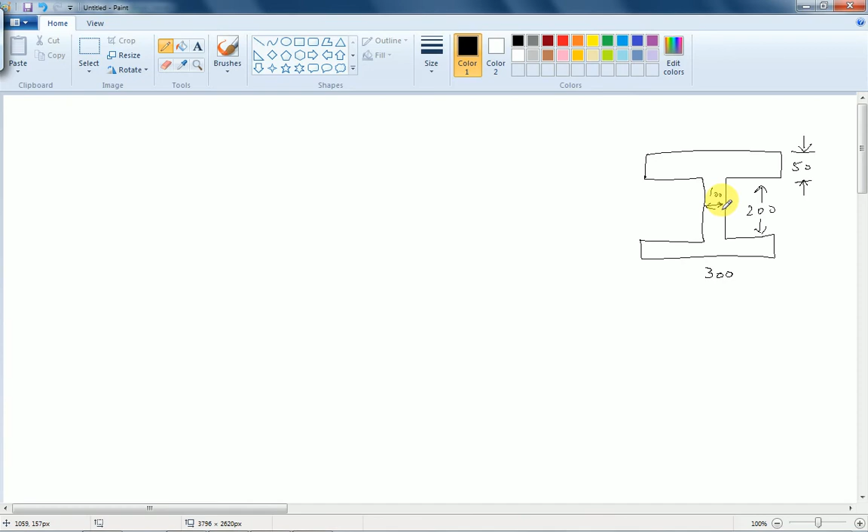All dimensions are in millimeter, मिलीमीटर में है, और इसका जो चीज़ फाइंड करनी है वो है मोमेंट ऑफ इनर्शिया इन एक्स डायरेक्शन।

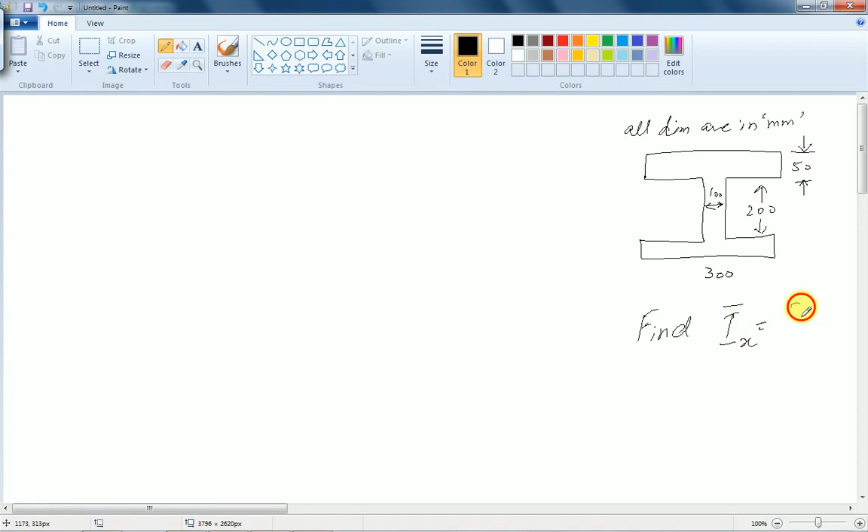ठीक हो गया। तो मोमेंट ऑफ इनर्शिया इसका एक्स एक्सिस में, यानी कि इस बीम के सेंट्रॉयडल एक्सिस के अबाउट हमने निकालना है। तो वो फाइंड आउट करना है। अब इस बीम का सेंट्रॉयडल एक्सिस बेसिकली इस आई बीम के क्रॉस सेक्शन का पूरा ओवरऑल सेंट्रॉयडल एक्सिस कुछ इस तरह ट्रेवल कर रहा है।

ठीक है। इसके अबाउट बेसिकली निकालना है। तो इसको सॉल्व करने से पहले हम एक बात रिकॉल कर लेते हैं।

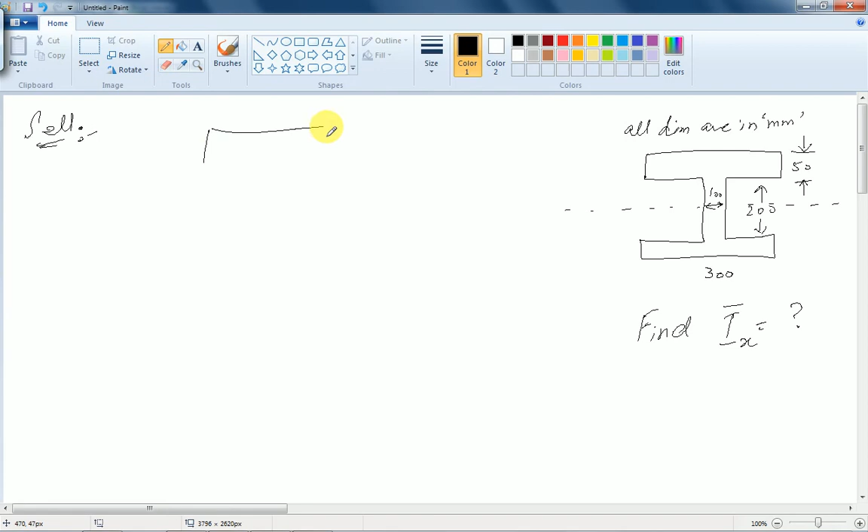कि अगर हमारे पास एक रेक्टेंगल हो और उसका सेंट्रॉयडल एक्सिस कुछ इसी तरह रेफरेंस पर ही है, एक्स वाई, और उसकी हाइट H है और उसकी ब्रेथ B भी है, ये डायमेंशंस हैं इसकी। तो इसका मोमेंट ऑफ इनर्शिया क्या होगा?

तो इसका मोमेंट ऑफ इनर्शिया जो हमने पता है, I_x के अबाउट, वो बेसिकली 1/12 B H क्यूब, ये इसका मोमेंट ऑफ इनर्शिया होगा। लास्ट लेक्चर में इसको हमने डिराइव भी किया है, क्योंकि ये इस रेक्टेंगल के अपने सेंट्रॉयडल एक्सिस जो कि एक्स एक्सिस में से पास करेगा, इस रेफरेंस में से पास करेगा, इसके अबाउट है।

इसलिए ये 1/12 B H क्यूब इसका बनेगा। लेकिन लेट्स सपोज अगर हम इस रेक्टेंगल के सेंट्रॉयडल एक्सिस की बजाय अगर हम इस पॉइंट पर, इस एक्सिस पर, एक्स डैश एक्सिस, वाई डैश एक्सिस, इस एक्स एक्सिस के अबाउट अगर हम निकालने की कोशिश करें, मतलब I_x डैश, तो इसकी वैल्यू क्या होगी?

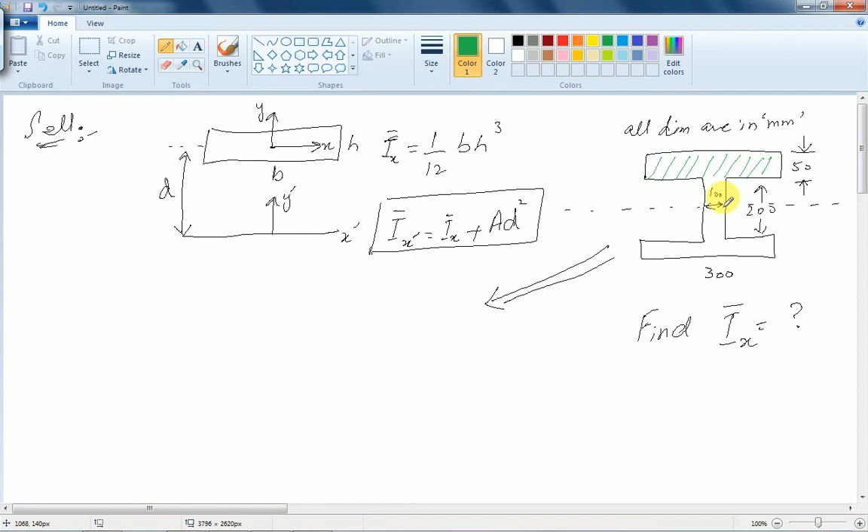इस चीज़ को याद रखते हुए हम अब अपने प्रॉब्लम पे आते हैं। बेसिकली हमारा ये जो प्रॉब्लम है, इसको हम डिफरेंट हिस्सों में डिवाइड करते हैं। पहला हिस्सा ये रेक्टेंगल हमारे पास है, ये ग्रीन कलर की। इसी तरह दूसरा हिस्सा है हमारे पास ये वाली रेक्टेंगल, ये ब्लू वाली। और इसी तरह तीसरा एक हिस्सा है, तीसरी रेक्टेंगल ये है, ये रेड वाली जो मैंने हाईलाइट की है। और ये पहली रेक्टेंगल है। तो इसी तरह हम ये पहली रेक्टेंगल को इधर ऊपर अगर बनाएं तो ये बेसिकली ये चीज़ बनती है पहली, दूसरी, और ये तीसरी, ये 3 रेक्टेंगल्स बेसिकली बनती हैं।

तो इन तीनों को हम सॉल्व करने की कोशिश करते हैं। जो सबसे पहले ऊपर वाली ग्रीन रेक्टेंगल लेते हैं, मतलब इस पूरी आई बीम का जो क्रॉस सेक्शन है, इसका मोमेंट ऑफ इनर्शिया जो वैल्यू होगी वो बेसिकली होगी आई एक्स बार विल बी इक्वल टू मोमेंट ऑफ इनर्शिया ऑफ दिस रेक्टेंगल प्लस मोमेंट ऑफ इनर्शिया ऑफ दिस रेक्टेंगल प्लस मोमेंट ऑफ इनर्शिया ऑफ दिस रेक्टेंगल। इन तीनों का मोमेंट ऑफ इनर्शिया हम ऐड करेंगे। तो सबसे पहले पहले वाली ये रेक्टेंगल ले लेते हैं, ग्रीन वाली। इसका मोमेंट ऑफ इनर्शिया क्या होगा, आई एक्स बार ऑफ फर्स्ट रेक्टेंगल प्लस आई एक्स बार ऑफ सेकंड प्लस आई एक्स बार ऑफ थर्ड।

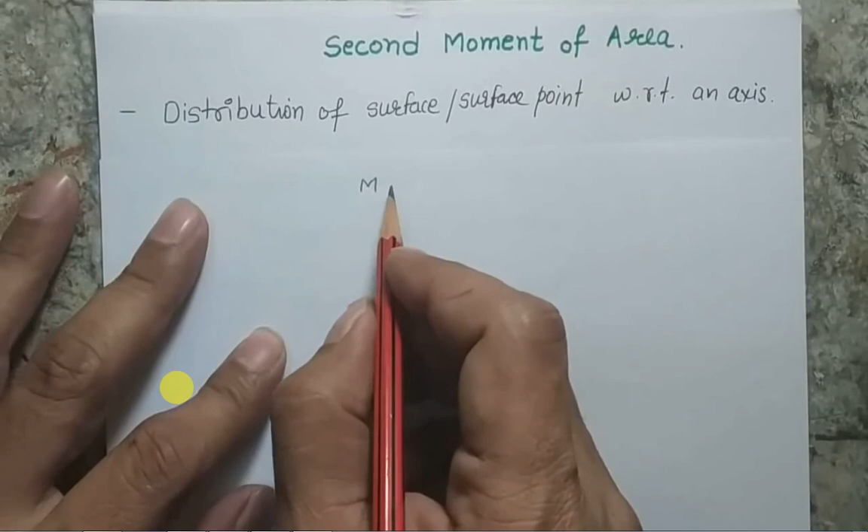This session is dedicated to understanding of second moment of area. Basically, second moment of area is a mathematical term we have defined to understand the distribution of a surface or a surface point with respect to an arbitrary axis. What does it mean? If we recall the term moment of inertia, we have already studied this term in our school, that moment of inertia basically tells us the inertia against the rotational motion.

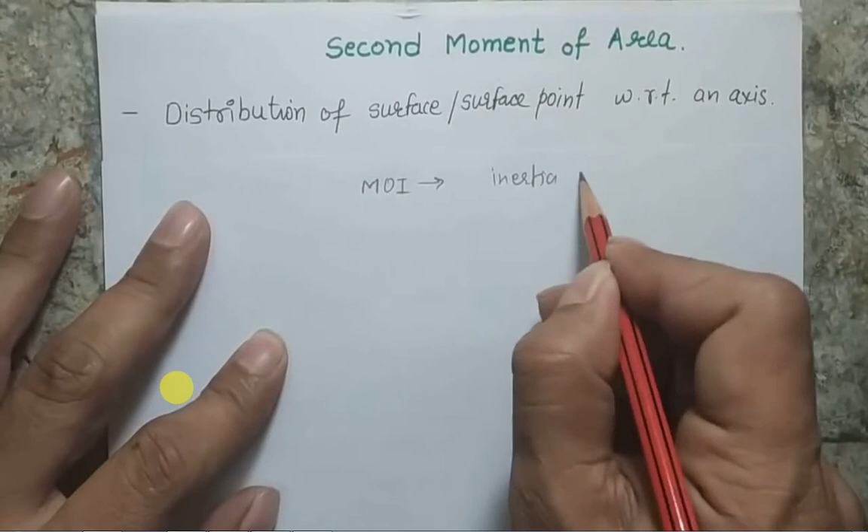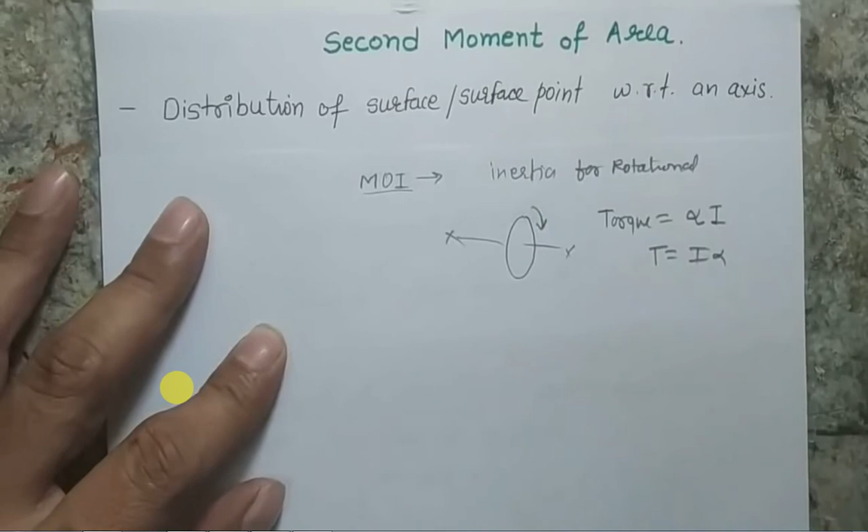That means if I am having a body which is able to rotate about an axis, suppose the axis is xx and this body is capable to rotate about this axis, so what would be the value of torque to achieve a particular angular acceleration alpha can be defined with the help of its moment of inertia. So torque is equal to I alpha, and this moment of inertia is basically equivalent to the inertia which we discuss about linear motion, where force is equal to mass into acceleration, where m represents the inertia when we talk about linear motion. Similarly, the moment of inertia represents the inertia against rotational motion.

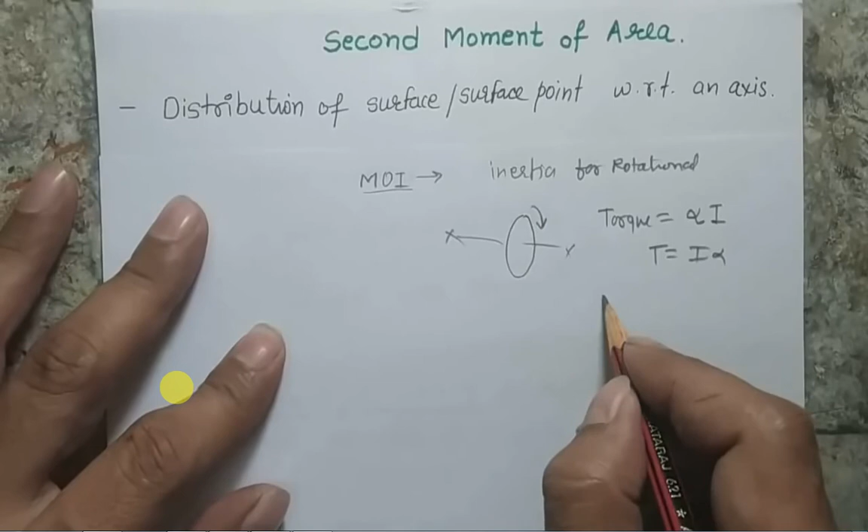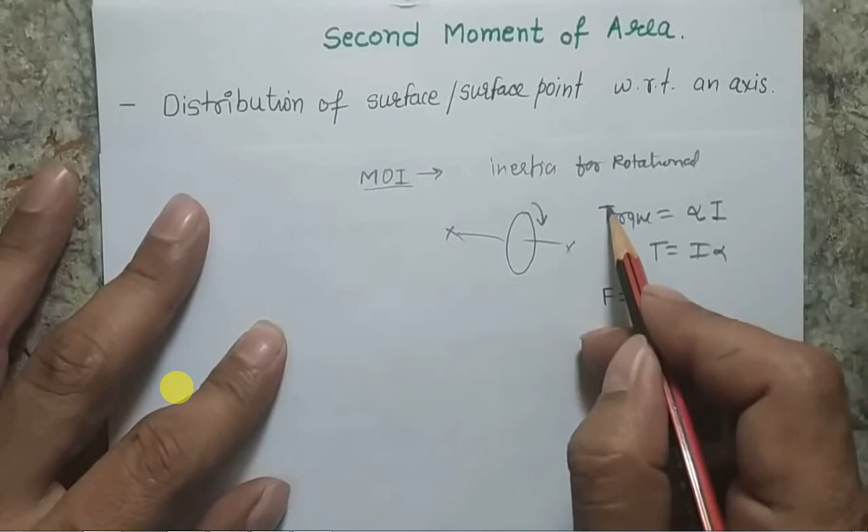Torque is equal to I alpha, and this moment of inertia is basically equivalent to the inertia which we discuss about linear motion, where force is equal to mass into acceleration, where m represents the inertia when we talk about linear motion. Similarly, the moment of inertia represents the inertia against rotational motion.

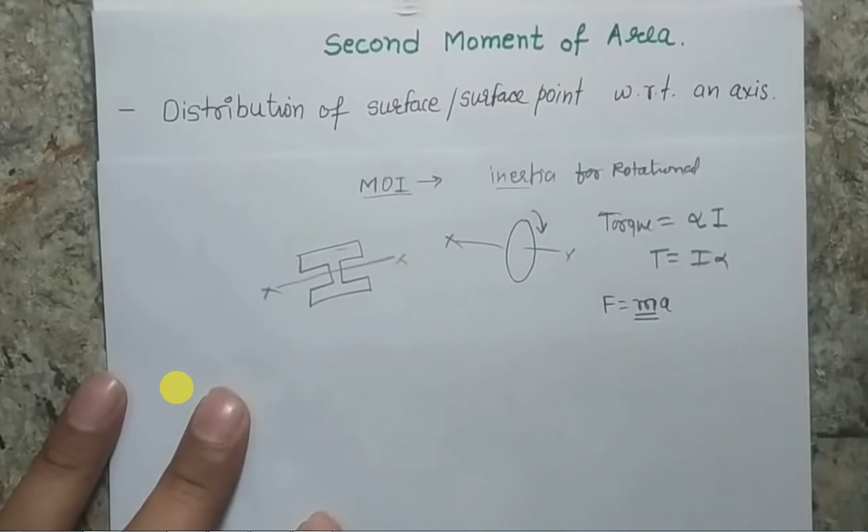This is another form of this moment of inertia, but particularly we are not talking here about the distribution of mass about an axis of rotation. Instead of that, we talk about the distribution of area itself. For example, if I am having this kind of a body and I am interested to understand what is the distribution of its area about this axis, this is my axis — this sort of thing we discuss and understand in the second moment of area.

I will also explain the physical significance of second moment of area, or where it is particularly applied in the engineering field. So let's start that the second moment of area, also known as the area moment of inertia or the second area moment — these are different names. We can call it anything, the second moment of area, or sometimes it is called the moment of inertia of an area. All the terms are similar and the meaning is the same in all cases. So now let's try to understand that — I have already said this is the moment of inertia.

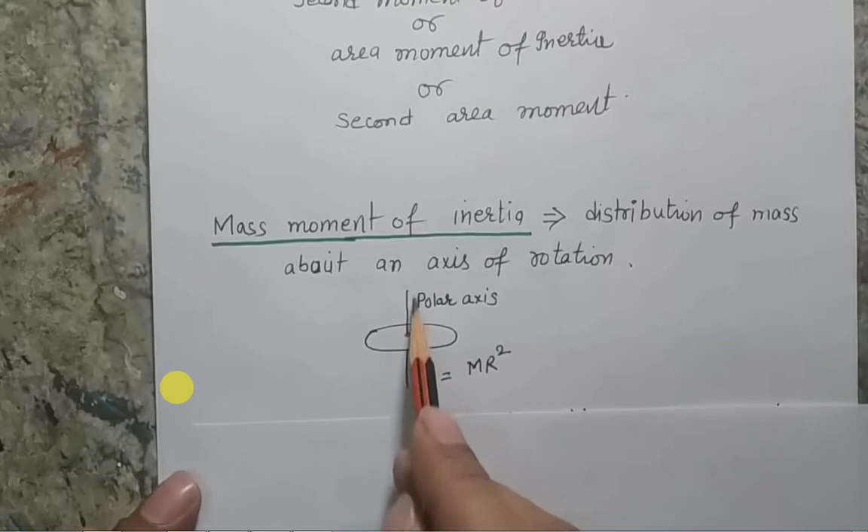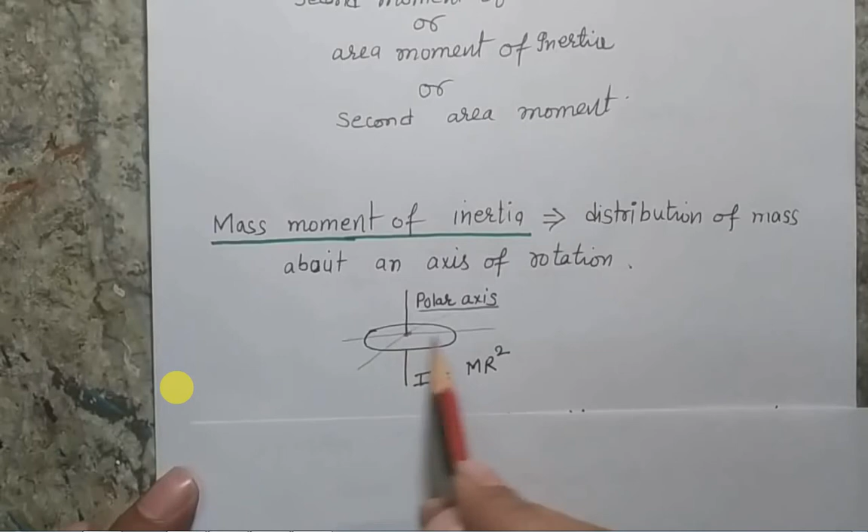Suppose I am having a ring which can be rotated about an axis passing from the center of the ring, perpendicular to the surface of the ring. This axis perpendicular to the surface is known as the polar axis. If I am talking about axes passing from the center but within the plane, these are known as axes in the plane. But an axis perpendicular to the surface is basically known as the polar axis. We should remember this term because it will be used in the study of second moment of area.

So moment of inertia basically represents the distribution of mass. Similarly, its application gives the sense of the value of torque required to get a specific angular acceleration.

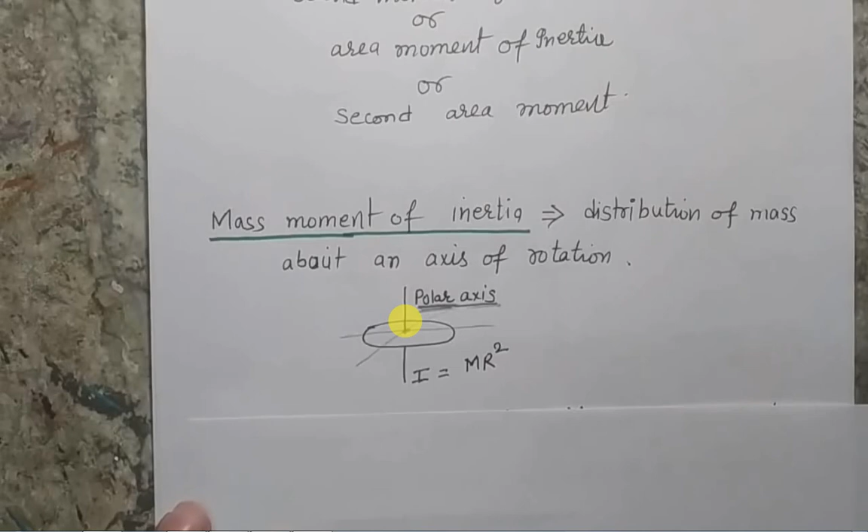So moment of inertia basically represents the distribution of mass. Similarly, its application gives the sense of the value of torque required to get a specific angular acceleration.

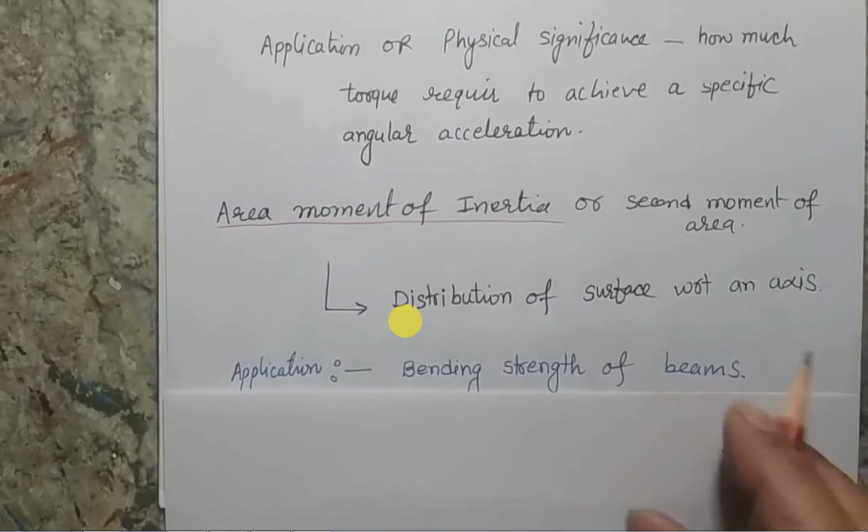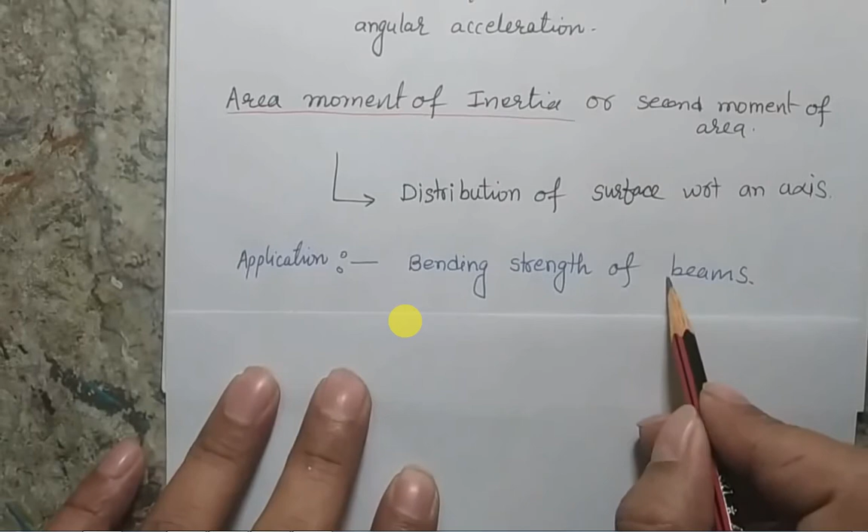In case of second moment of area, it gives the distribution of surface with respect to a particular axis, and one of the apt applications of second moment of area is to find the strength of beams. Now you should understand what a beam is.

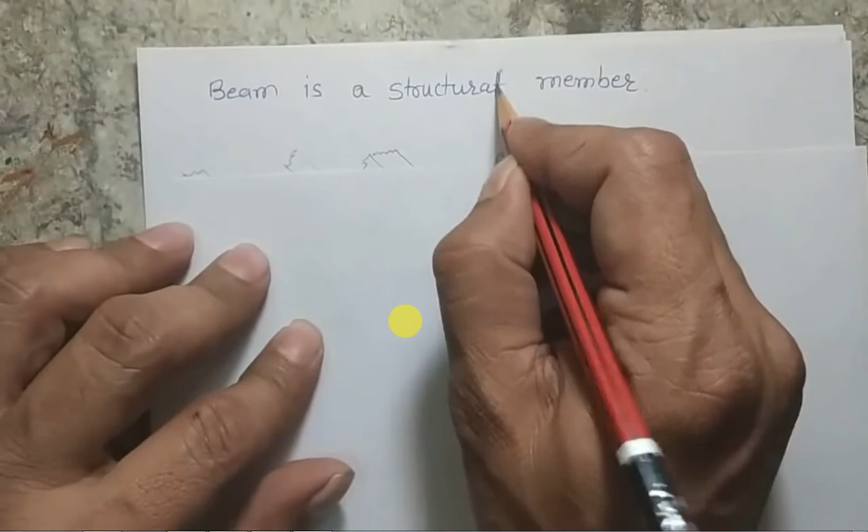So beams are basically structural members which are used in many engineering constructions, to make the frames, or to make the machines or the trusses. Anywhere where we have structures, we need such long beams.

There are many types of beams and cross sections, for example square, cylindrical, C-section, channel C-section beams you may have seen. I-section beams are very common in construction purposes.

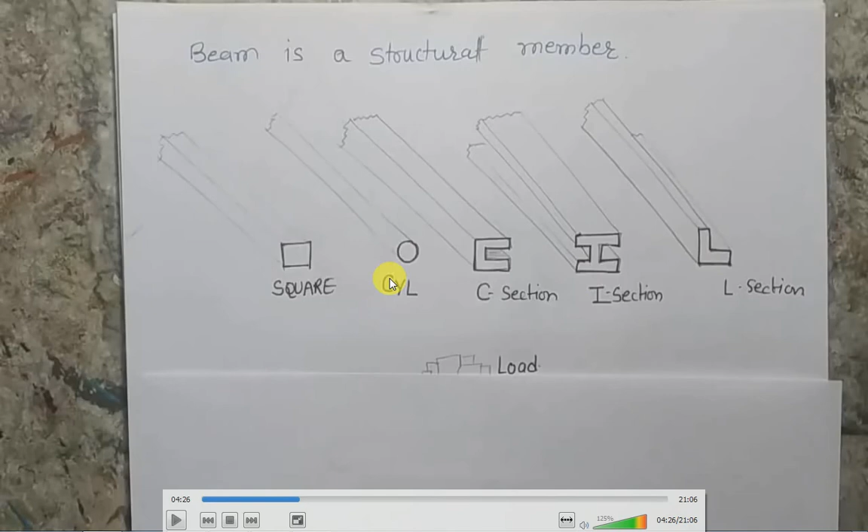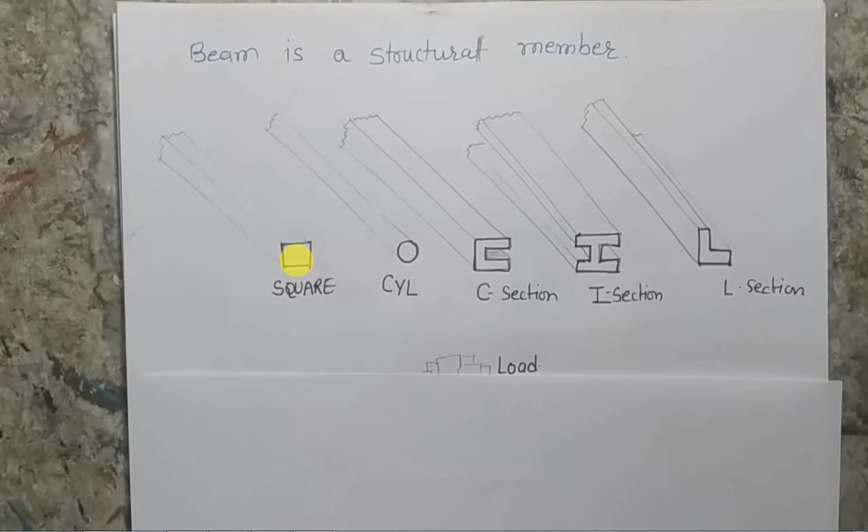And those are subjected to transverse loads and bending loads, so wherever we have a structure subjected to transverse load, we require beams. So a beam may be of different cross sections: square, cylindrical, C-section, I-section, L-section. You may also see different sections like T-sections or other sections.

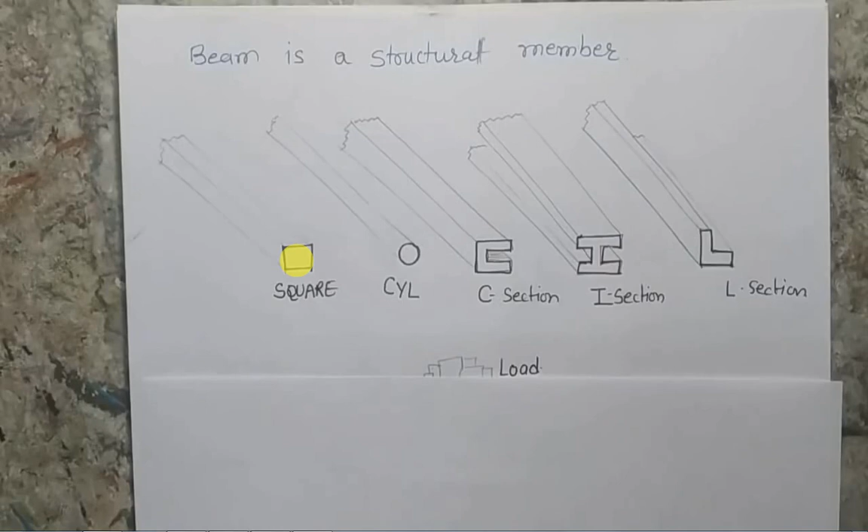So what is the significance of different cross sections? Why do we only use a square section or a cylindrical section? Because its manufacturing is simple. How can we make these types of structures? Basically we use the rolling process or the extrusion process to make the beams.

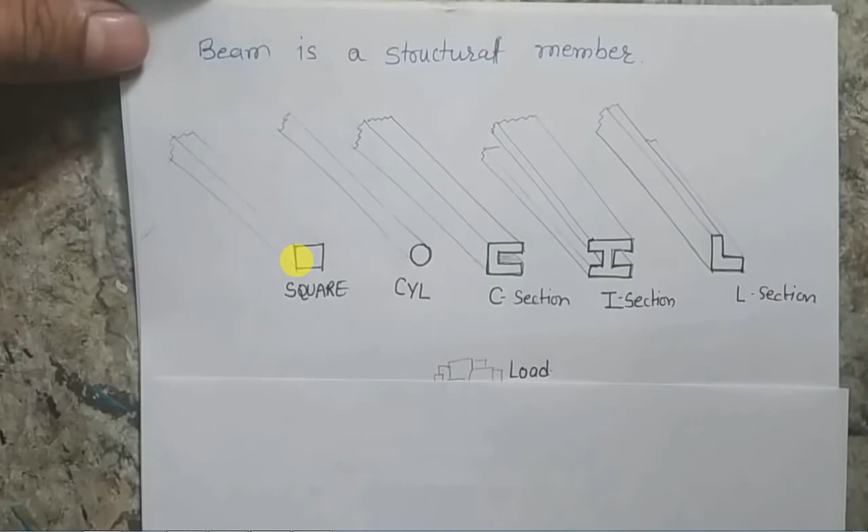But what is the requirement of the C-section, I-section? Let's take an example and try to understand first the beam strength, so that we will be more clear about the physical significance of second moment of area.

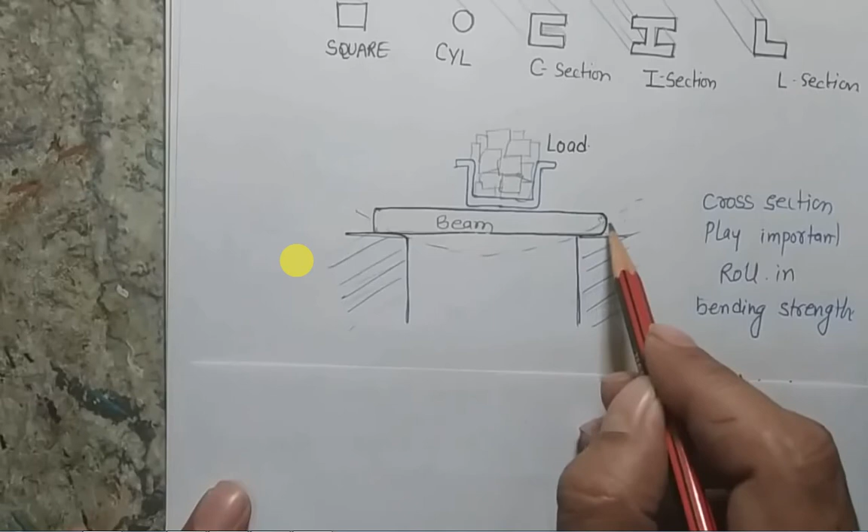Suppose I am using a beam to support a heavy load between two surfaces. If I cut my beam at this point, I can see the cross section, which may be square, cylinder, I, T, whatever. This cross section has an important role in the bending strength of this beam.

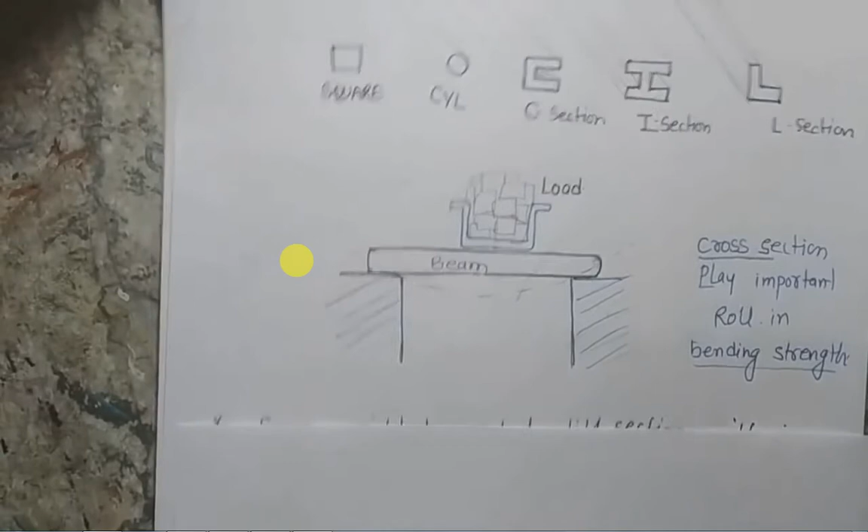In what way? This is the topic we basically study in the strength of materials course. I am not going to give more detail here, but I will give you an essence so you have a feel for the topic. So suppose this beam is loading this weight, and due to the load, the cross section plays a very great role in the significance or strength of the beam.

In mechanics of materials 1, we have studied the cross section dimensions: B, the width, and H, the height.

On these values of cross section, beam strength and stability totally depend upon these dimensions. So 1 by 12 BH cube of a rectangular or square beam defines how long the beam will stay, or when and how much the beam will bend upon a particular load.

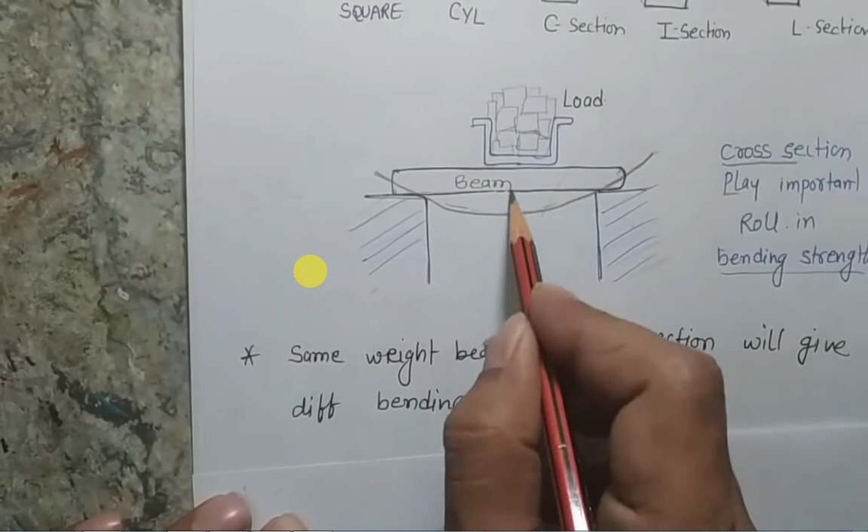The beam has bending, and the bending at the center of the beam is defined by a term delta or del.

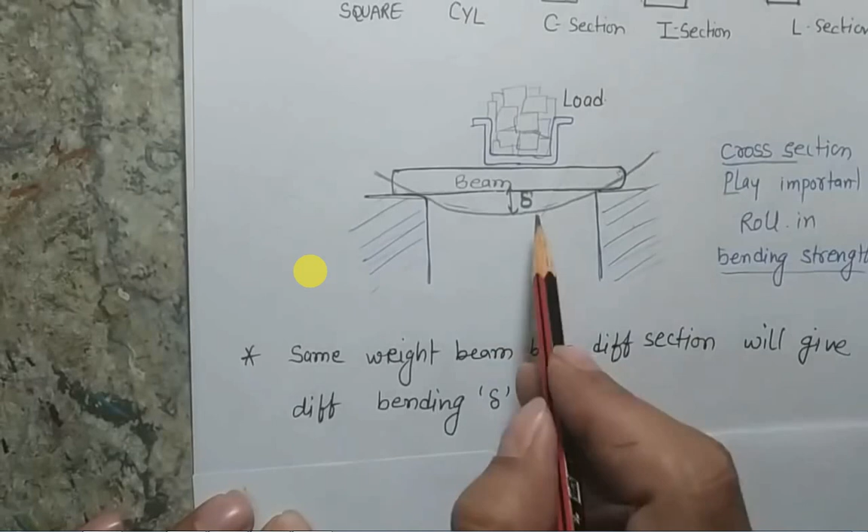What would be the value of del, basically governed with respect to different sections? The strength or deflection value of the beam can be defined as the strength of the beam. If the bending of the beam is large, we say the beam has lower bending strength; if the beam is very rigid and doesn't show deflection, the beam is very strong. That strength is basically proportional to the second moment of area.

How we get this formula, I am not going to give in detail. If you are interested, you have to study the books available for the strength of materials course.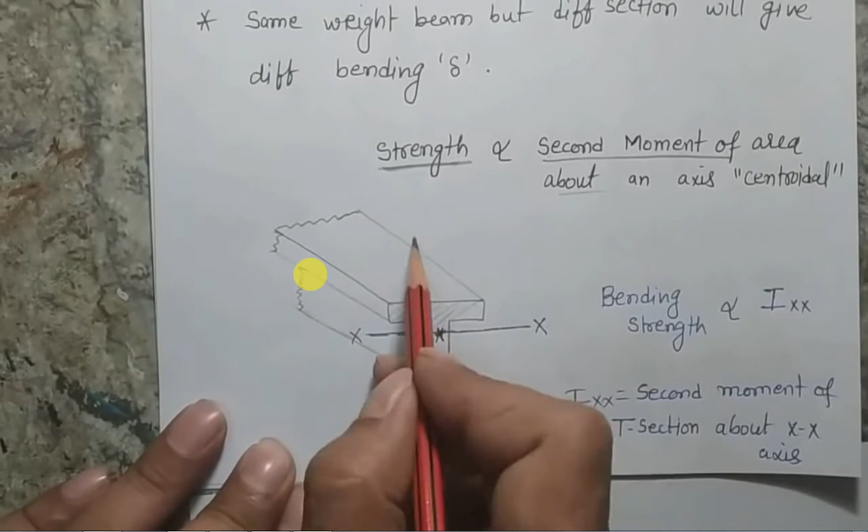Here I am just giving you an essence: suppose I have a T section beam, and here is the centroid of the beam, with an axis passing through the centroid. This is the depth or length of the beam, and I want to find, if I use this T section beam here, what would be the deflection.

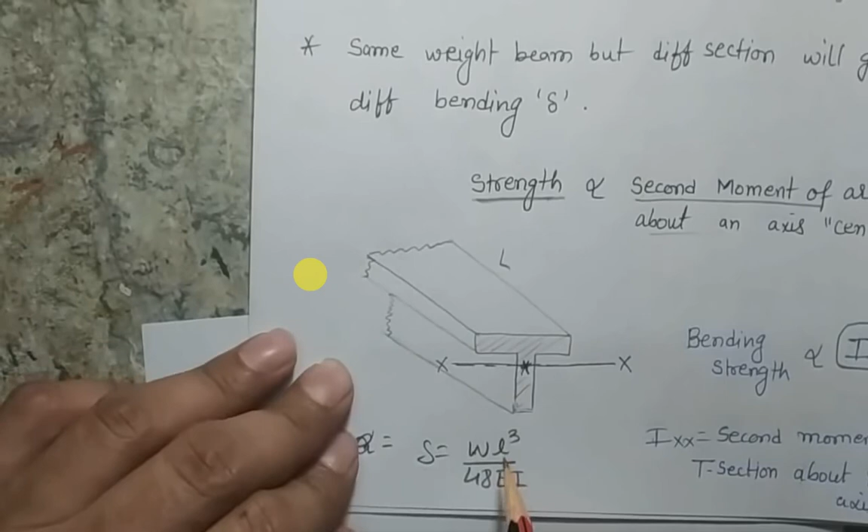That deflection can be calculated if I know the value of I, using a formula. I'll just give you the formula without going into detail: del can be calculated by W L cube by 48 EI, where W is the loading and L is the length of the beam. So for this context, if this is the length of the beam, the deflection of the beam will be WL cube by 48 EI.

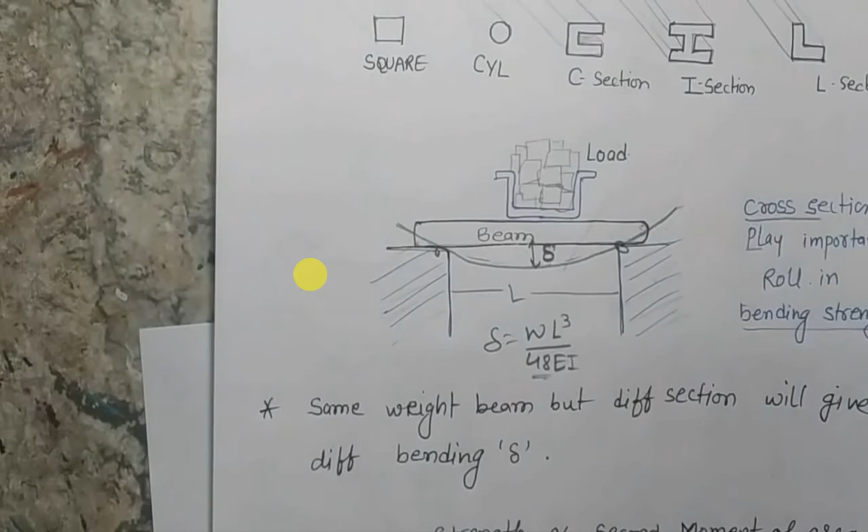And why 48? Because this is the case of a simply supported beam. For different boundary conditions, the formula changes, but this I basically gives you the value of del.

So this strength is inversely proportional to del, meaning strength is proportional to 1 by del, and so the strength will be proportional to I, because del is inversely proportional to I.

Now I am not going to any further detail of the strength of beams, and I am jumping to the mathematical expression of the second moment of area. For example, we have an arbitrary shape body. I am particularly talking about planar bodies because the whole syllabus for mechanics at the undergraduate level talks about planar sections. So here also I am taking a planar body.

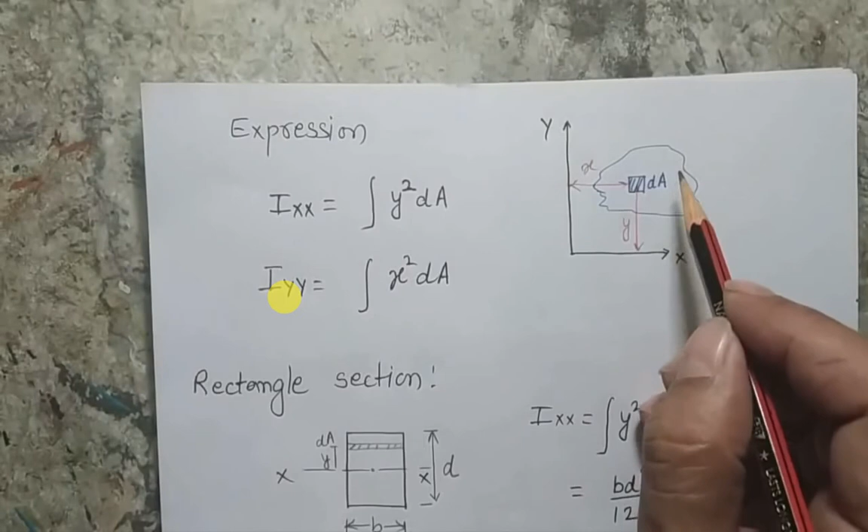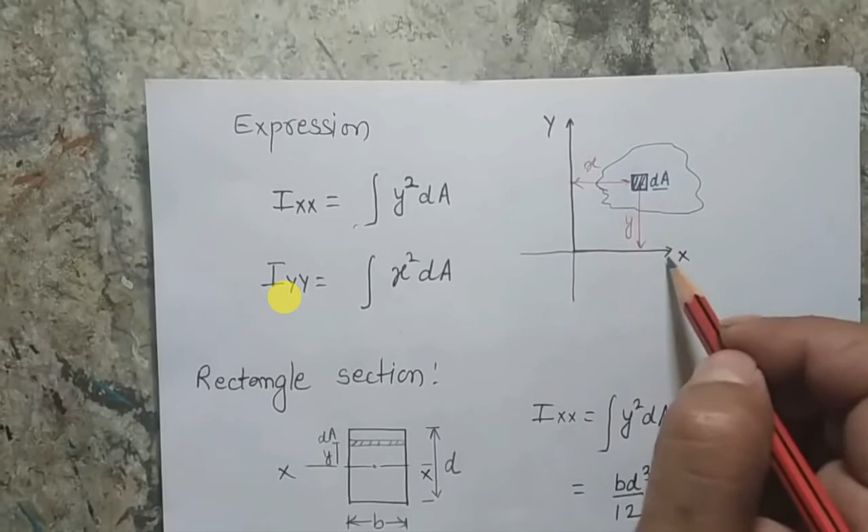Suppose I want to find the second moment of area of this body about the x-x axis or y-y axis. Here is the formula. First I assume a small section area del A, and if I know the distance of del A with respect to the x axis, here is the formula to get the moment of area about x-x. Similarly, for the second moment of area about y-y.

But let me tell you, in this whole subject we are not going to derive the formula for the second moment of area of different bodies. Instead, we are going to calculate the second moment of area for irregular shapes using standard shapes, just as we did to calculate the centroid.

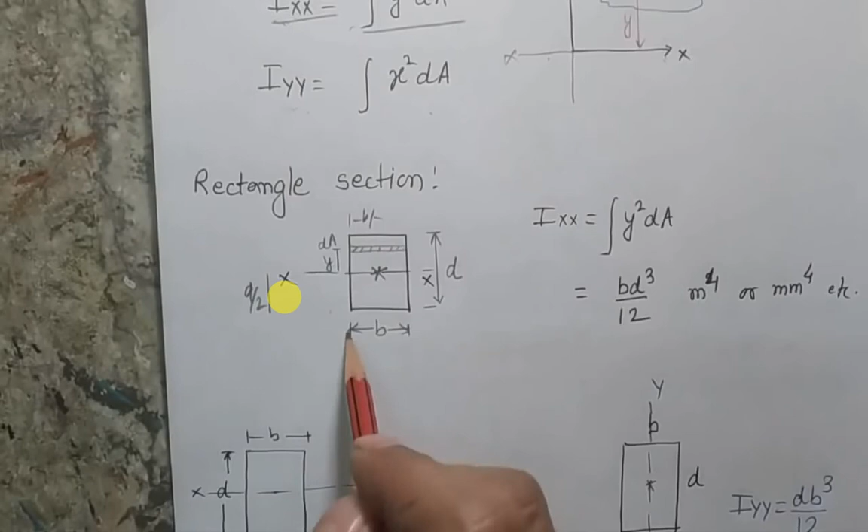So here I am showing you that one standard shape is a rectangular body. For a rectangular body, if the centroid is located at a distance d by 2 from the base and b by 2 from the side, I am interested to find the second moment of area about an axis passing through the centroid, generally known as the centroidal axis.

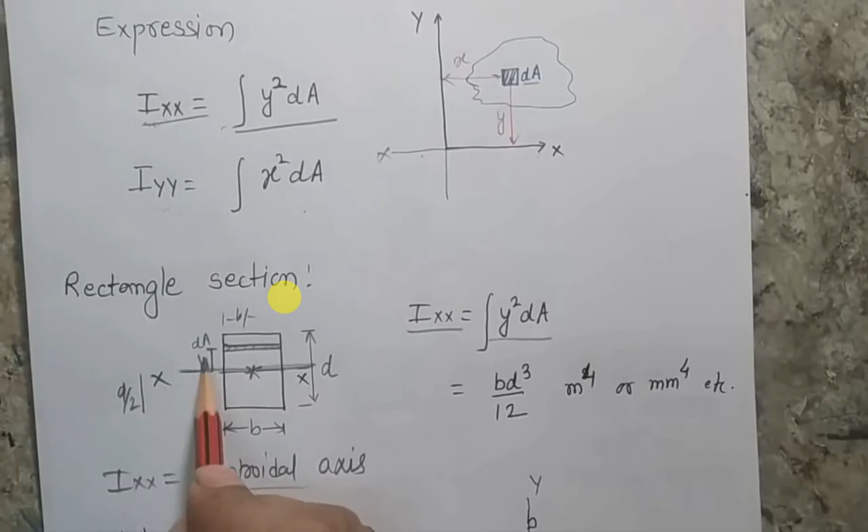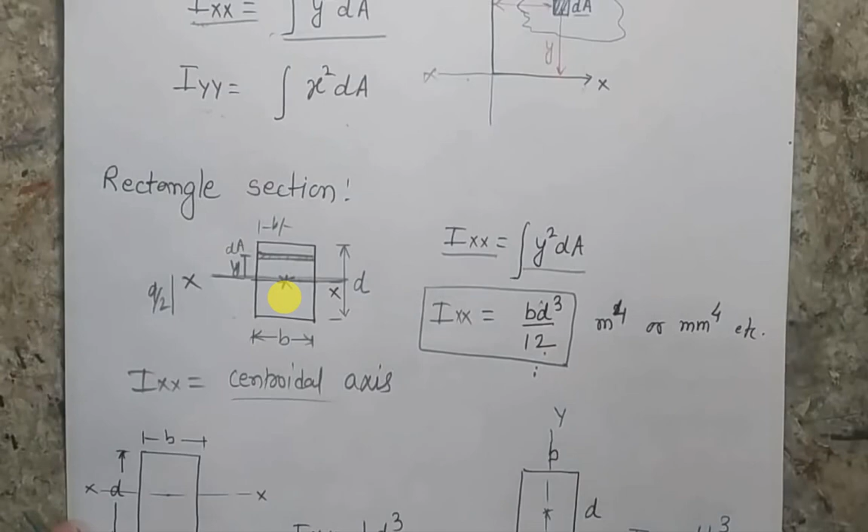Here IXX is defined as one of the centroidal axes. If I am interested to find it, I can consider a small strip at a distance y from this axis, and if I do the integration, I will finally arrive at the formula BD cube by 12. Please remember this formula, because it is not easy to derive every time, and we will use such formulas frequently to calculate the moment of area of different sections. So for a rectangular body, the mass second moment of area is defined by BD cube by 12.

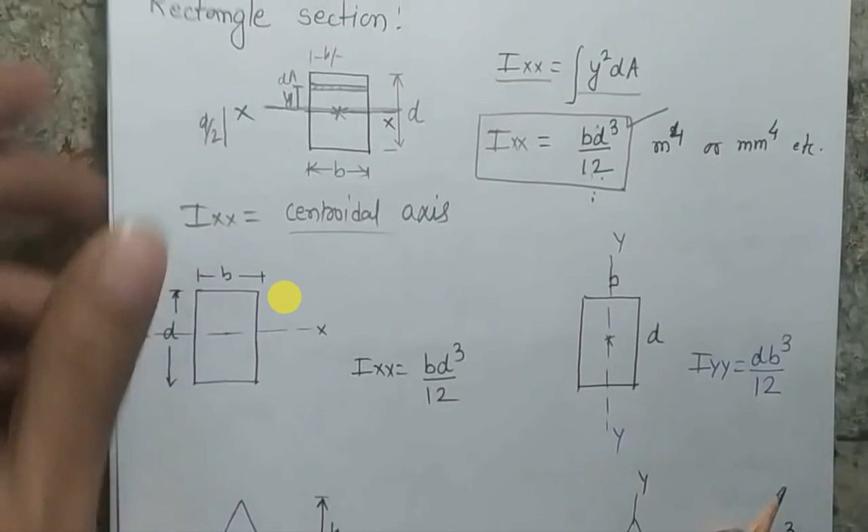Let me explain all the moments of area one by one. Suppose this is the rectangular body, and I am interested to find the moment of area about the x-x axis, which I already calculated: it is BD cube by 12. Now suppose I want the moment of area about the vertical centroidal axis, passing through the centroid in the vertical orientation. It will be just the opposite - the D and B will be replaced, so now it becomes DB cube by 12.

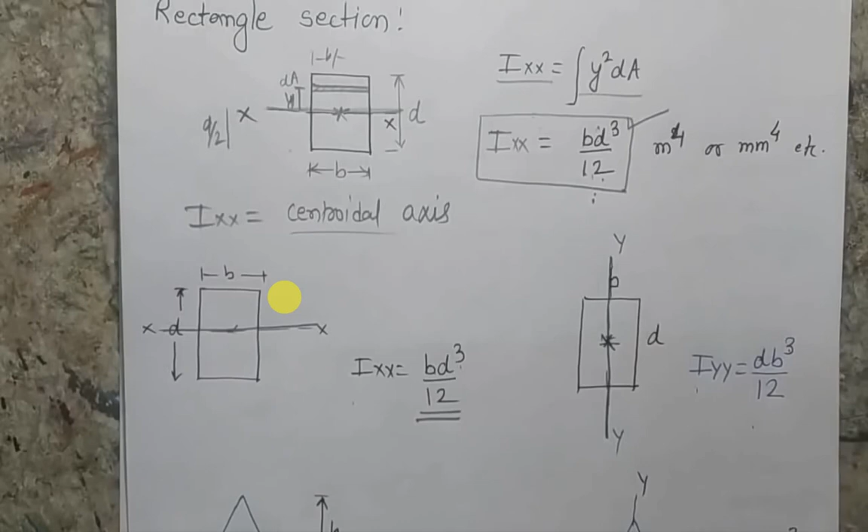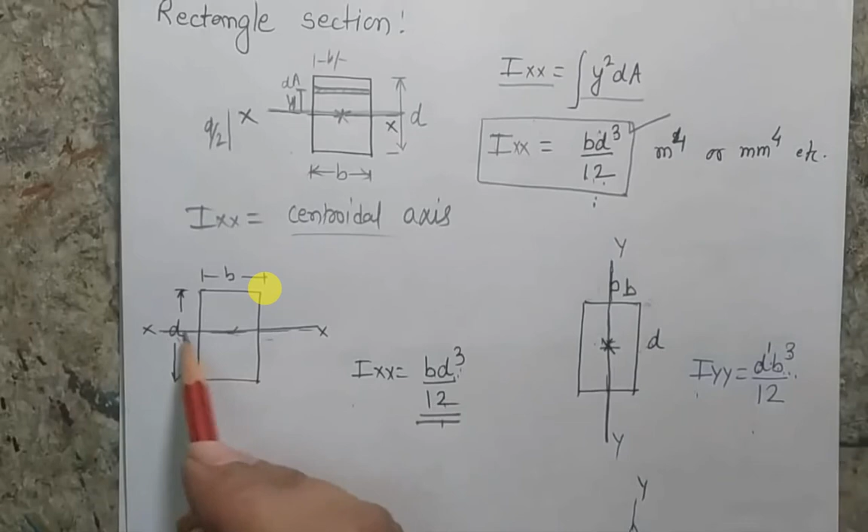I suggest students remember this formula and the axis rule: if the axis is cutting a particular line, then that side's term is raised to the power of cube. The size of that line is defined by B, so B will be in the cubic term, and the other term parallel to the axis will have power 1. Here, this is my axis and this is the side, so B is not in the cubic term, however D is in the cubic term.

Similarly, if you want to find the moment of area of a triangular section about its centroidal axis - in a triangle, the centroid is at a distance h by 3 from the base, if h is the height of the triangle. Its second moment of area is defined by bh cube by 36. Similarly, if I want to find the second moment of area about the y axis, it is defined by hb cube by 48.

This is a very interesting point: these two are not just interchanging terms, because the distribution of mass about these two sides is not represented simply by b and h. Similarly, these two formulas are not the same - you should remember that one is hb cube by 48 and the other is bh cube by 36. In one of my future sessions I will explain how we calculate these two, but not this time.

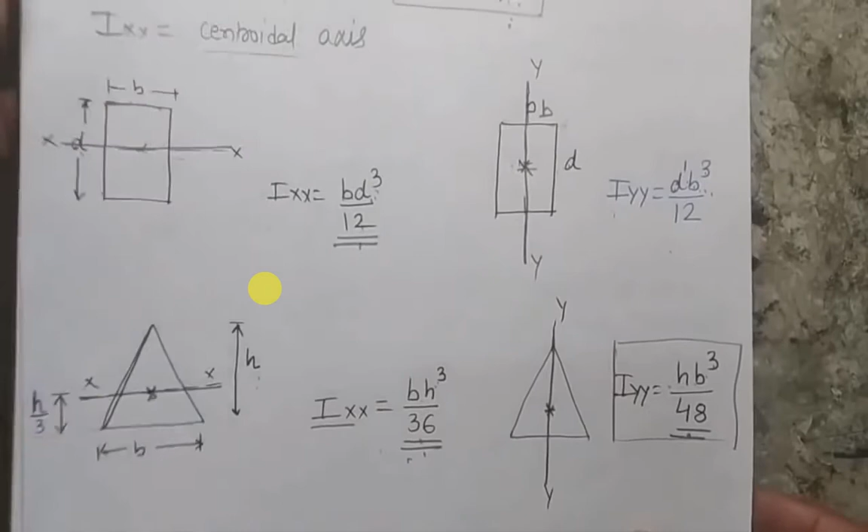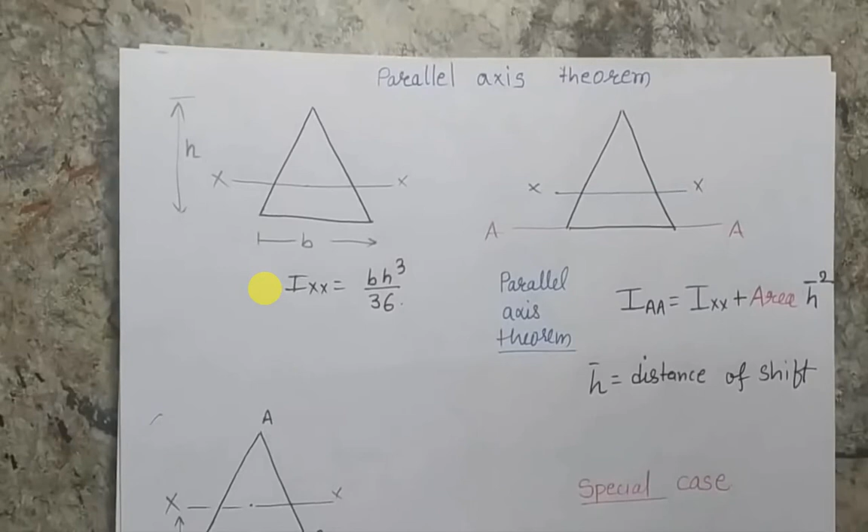Now let's move further and understand one of the important concepts, the parallel axis theorem. We are going to use it frequently to find different moments of area, and here I am going to explain how we can define this term.

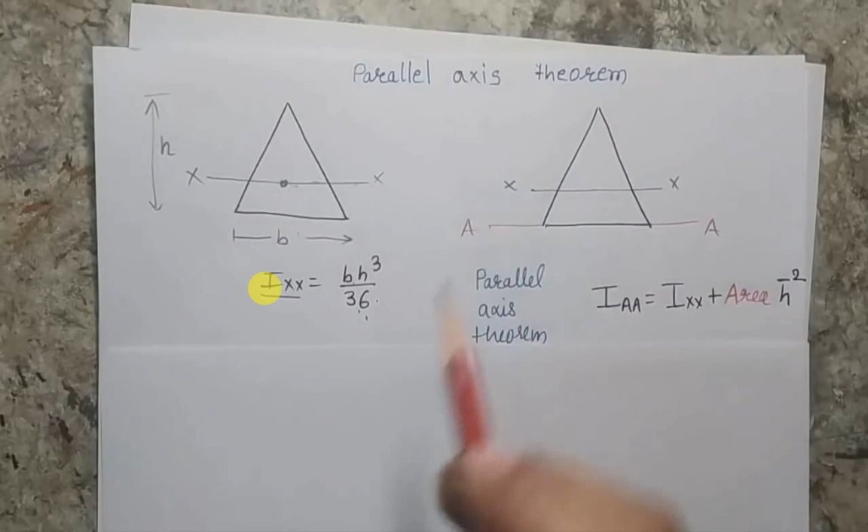Suppose I am having a triangle and I know its moment of area about its centroidal axis, which is parallel to the base. This is defined by Ixx, and the formula is bh cube by 36. But I want to find the second moment of area about a different axis, which is not passing from the centroid but is also parallel to this axis. So here I am showing one axis AA passing through the base, and I am interested to find the moment of area about this axis.

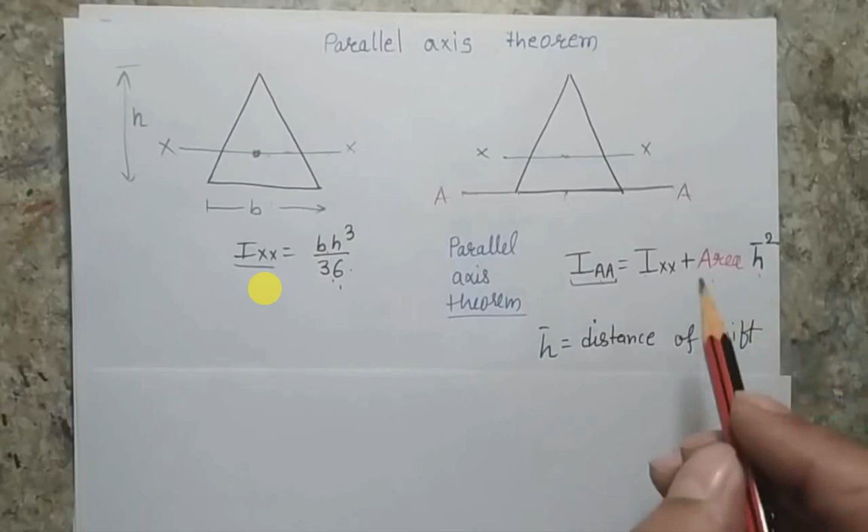So I have to use the parallel axis theorem, which states that to find the moment of area about a new axis, you must use the centroidal axis, the area of the triangle, and the distance by which you want to transfer the axis. So here it is Ixx plus area into h bar square, where h bar is basically the distance for which you want to shift or transfer your axis.

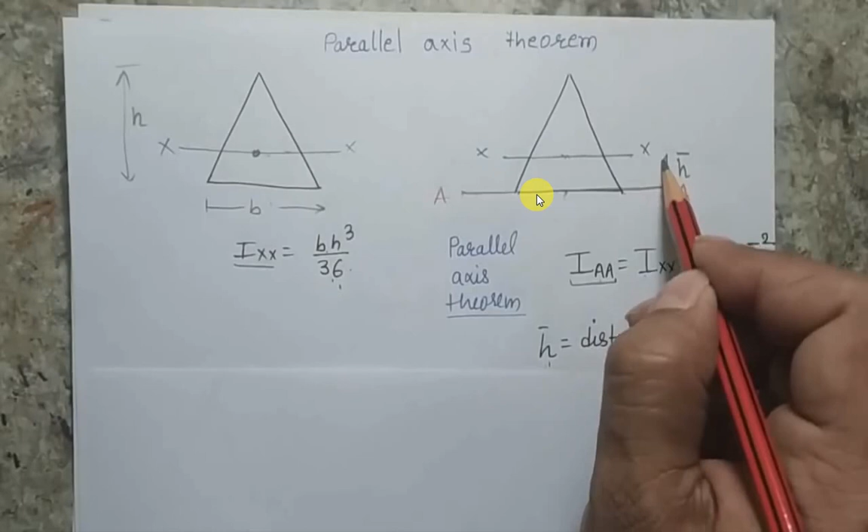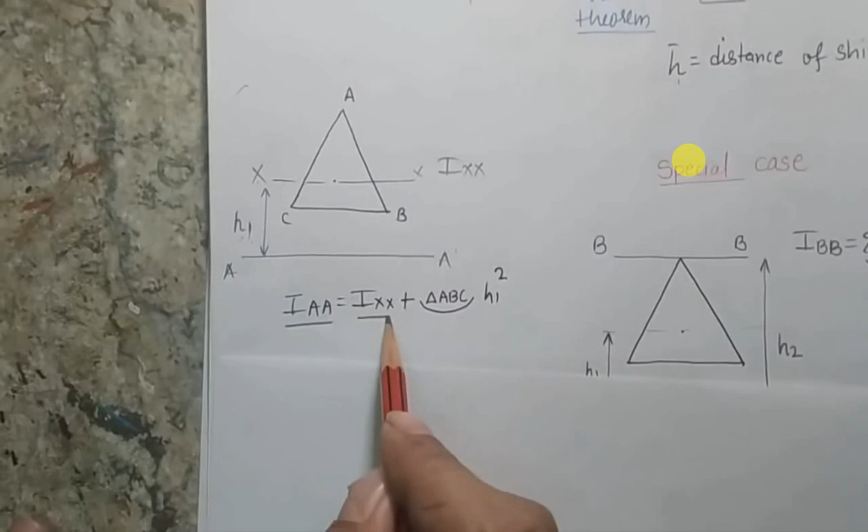So in my case, suppose I am having a triangle ABC and I know the Ixx value, and I want to shift or find the moment of area about an axis which is h1 away from this and parallel to this. The formula will be Iaa equals Ixx plus area of the triangle, which will be 1 by 2 into b into h, and the h1 square.

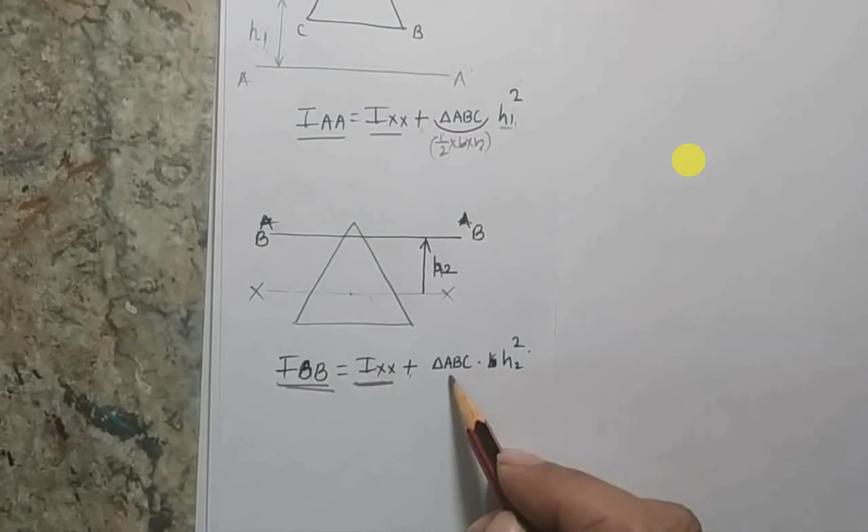Suppose I want to find the moment of area about another axis which is on the other side, a distance h2 away from this axis xx. So the formula will say that IBB, this axis is my BB axis, will be Ixx plus area of the triangle into h2 square. Now one special case where I want to convey you, suppose I am having a triangle and I know that...

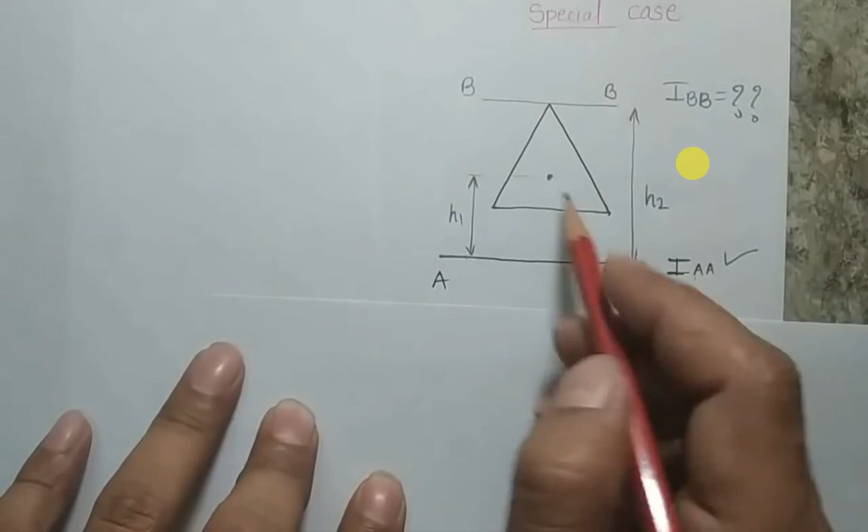Here is the centroid and I am having an axis AA. For what the moment of area is given to us, means for this case a body ABC is having a second moment of area IAA about this line, and I want to find the moment of area about another axis which is BB and h2 distance away from AA, and AA is h1 distance away from the centroid.

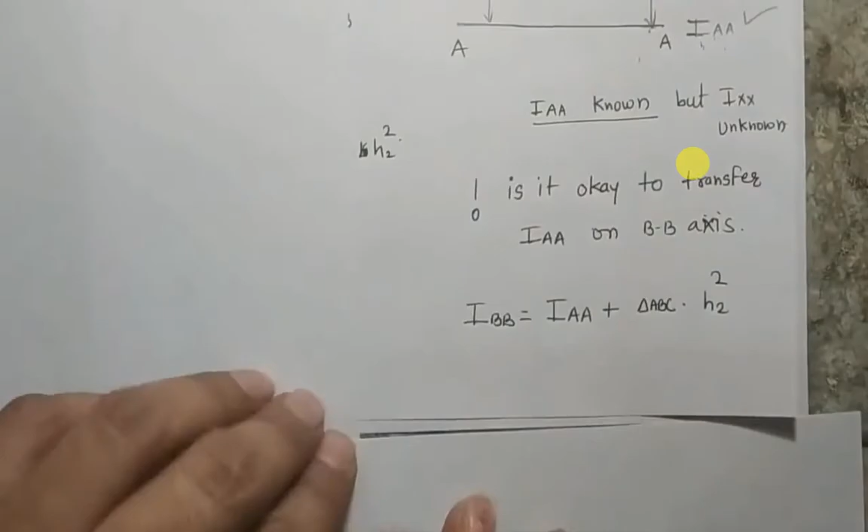So now my question is, is it possible to transfer AA directly to BB to get IBB? What does it mean? I want to say, is it okay to write that IBB will just be IAA plus area of the triangle into the square of this distance?

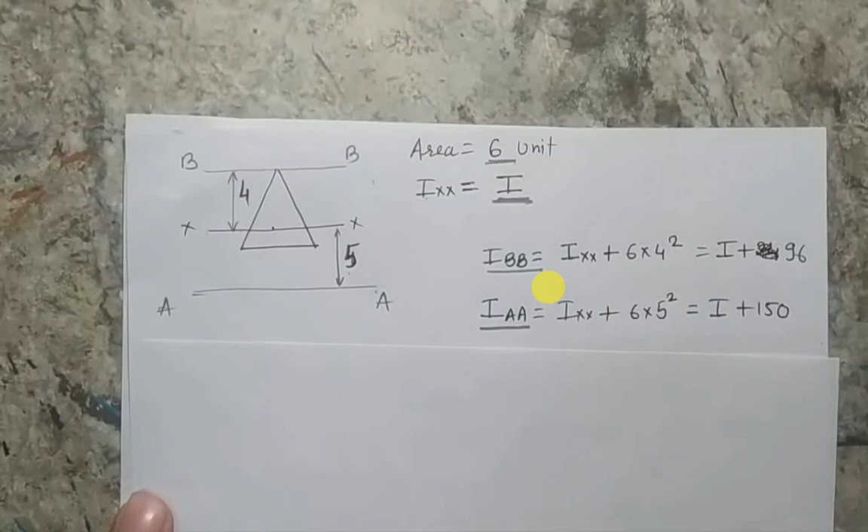Let, for example, suppose I am having a triangle and I know its centroidal axis moment of inertia is defined by just I, and the area of the triangle is suppose 6. There are two axes AA and BB. Suppose B is 4 unit distance away and A is 5 distance away, and I want to find the IBB and IAA. So as I know that from the parallel axis theorem, if I know IXX, I can transfer XX to either AA or BB to get the value.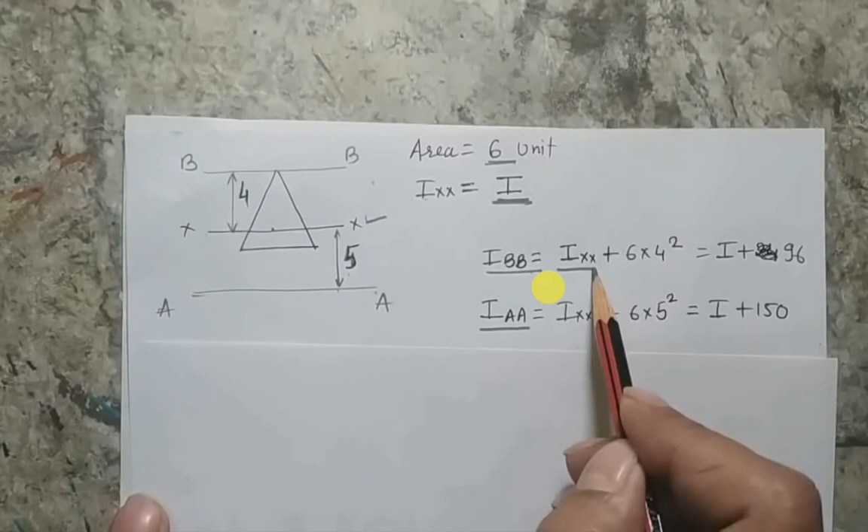For example, here I am showing IBB, which will be IXX plus area of the triangle, and the square of the distance I am transferring here, it is h bar square. So I know that this is the 4. So my moment of area will be I plus 96.

On the other hand, if I want to find the moment of area about the AA axis, my IAA will be what? IXX plus 6 into 5 square, that is coming out 25 into 6, that will be 150. So I plus 150.

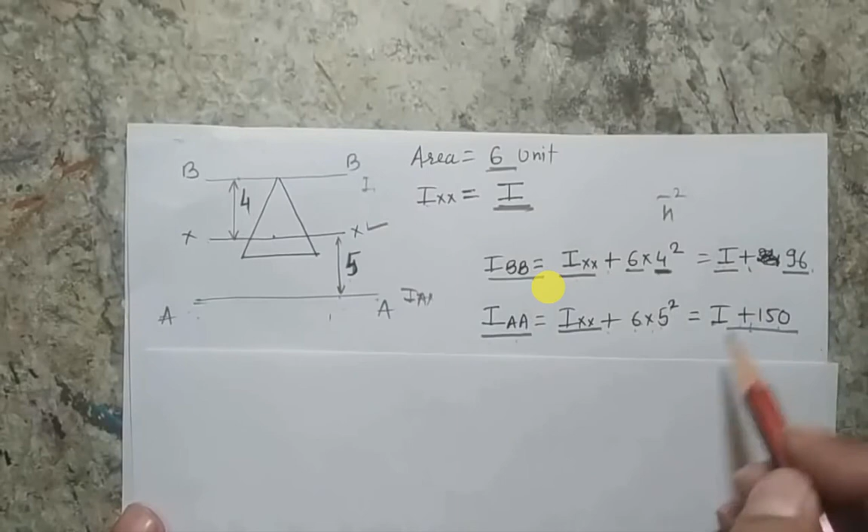So the moment of area about axis BB and AA are defined as I plus 96 and I plus 150. Now let's see if I want to find IBB using IAA, without using IXX, or if I want to use IAA to calculate IBB.

So what I will do is calculate IBB using this formula: IAA plus area of the triangle times the square of the distance I want to shift. In this case I want to shift from here to here, that means 5 plus 4, equals 9. So my answer for IBB, which is I plus 150 itself, is IAA plus these two values, giving a value of 486. So my new value comes out to I plus 626.

So what is the correct value? Is this correct, or is that one correct? Please remember, this is not the correct approach. Whenever you want to shift an axis, you have to use the centroidal axis. You cannot use any other axis, otherwise your answer will not be correct.

Why does this happen? Because once you transfer this value from here to here, and then again transfer from here to here, you are basically using this distance two times. Once you come from here to here, you consider this distance, and when you go from here to here again, you are mapping this distance two times, which is not correct.

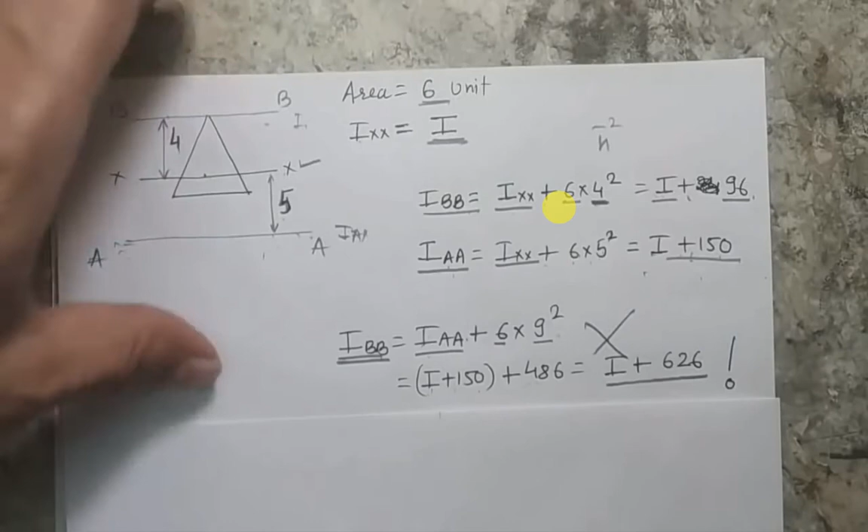So this is one of the thumb rules: whenever you want to shift an axis, you will always shift the centroidal axis. Now quickly I am showing the moment of area of different shapes, which we are going to discuss in detail in my next lecture.

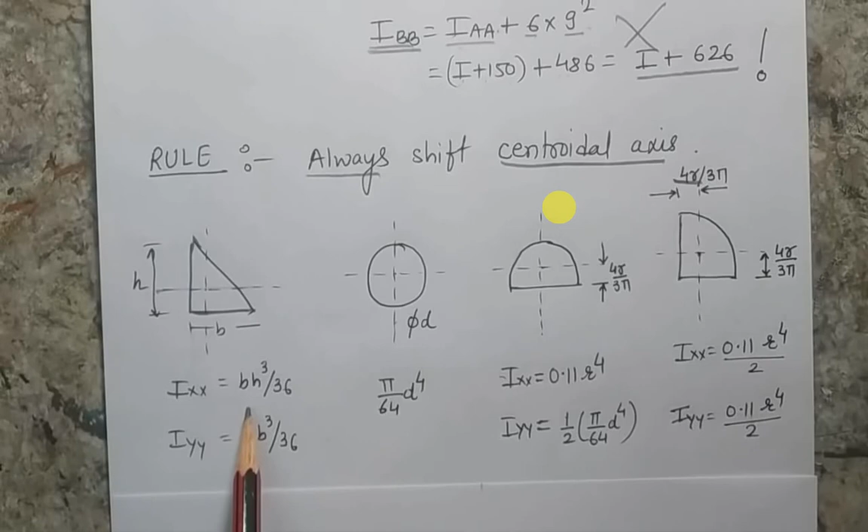Here is the case of a right angle triangle having two centroidal axes, and the moment of area about these two centroidal axes are BH cubed by 36 and HB cubed by 36. You can see these two terms basically interchange.

But if you recall, in the case of another kind of triangle which is not a right angle triangle, and if I want to find the moment of area about its two centroidal axes, one centroidal axis is BH cubed by 36, but the other centroidal axis is HB cubed by 48. But for the right angle triangle, these two values are similar, only B and H interchange.

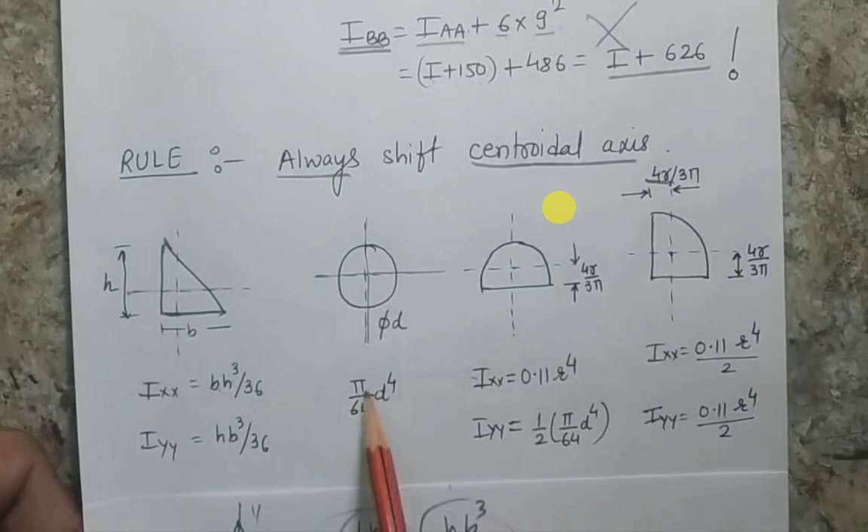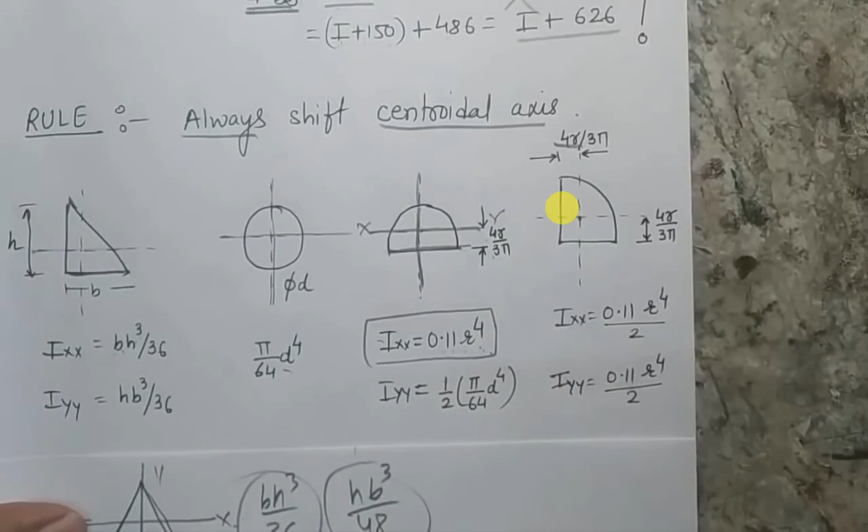In case of a semicircle, there are two centroidal axes. One centroidal axis, parallel to the diameter, is located at a distance of 4r by 3 pi, and for this axis, my x-axis, the moment of area is defined by 0.11 r to the power 4. I request students to please remember this formula, because you are not going to derive it, you are going to use these formulas to calculate the moment of area for different sections.

Similarly, for the vertical axis, it is just half of this value, so this will be half of pi by 64 times d to the power 4.

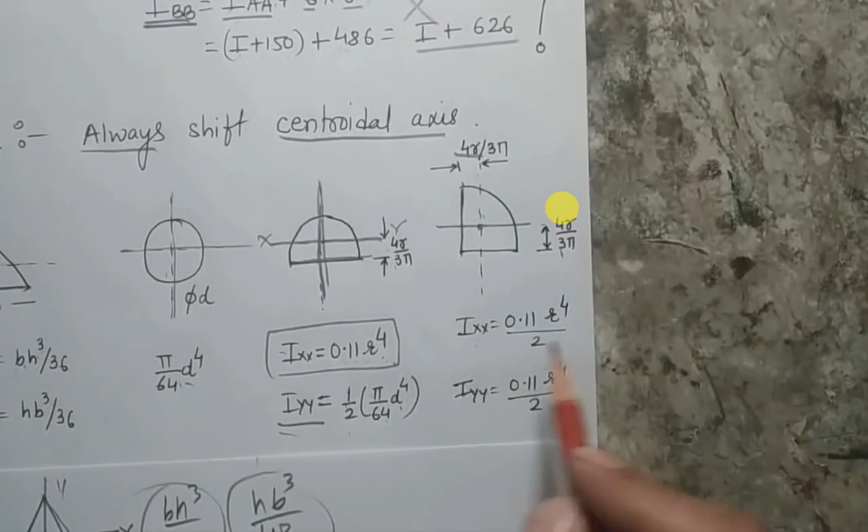And for a quarter circle, here is the centroidal axis, and for both centroidal axes the moment of area is equal, which is half of 0.11 r to the power 4, so that's 0.11 r to the power 4 by 2. In my next lecture we will further discuss the moment of area of circular sections, and then solve some important problems.